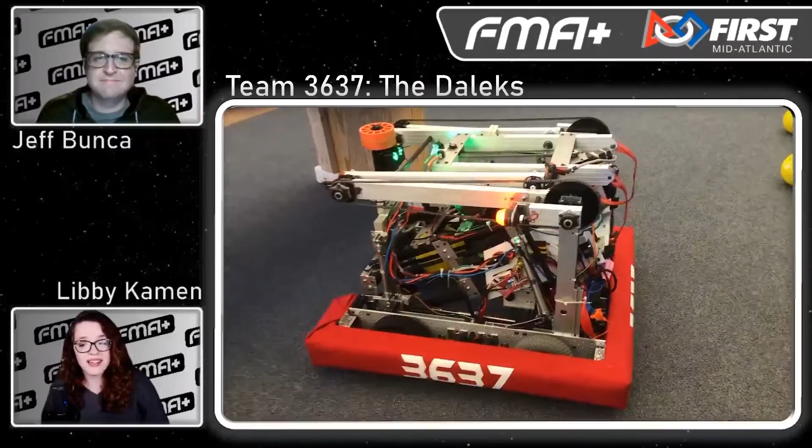Very cool. So let's dive into that robot. Ryan, what were your team's goals when you guys started the season? So when we started the season, we wanted to win a blue banner for our robot this year. That's something we've never done before. So we were really setting our sights high this year. And in order to do that, we wanted to create an innovative robot that could complete all aspects of the competition. Yeah, that sounds like a fair way to definitely compete for one of those coveted blue banners.

Jacob, what did you prioritize in your planning of the robot? What were your priorities? The main thing we prioritized this year was actually the climb. We knew it was a very high-scoring aspect of the challenge, so we really wanted to put most of our effort into making a climb that we knew could double climb very frequently. Another thing that we had to really prioritize was how we were going to shoot, and shooting high versus shooting low really ended up splitting our team.

We really wanted to decide whether or not we should go with the reliability of low shooting or the high-scoring aspect of the high shooting. In the end, we went with the low shooting just because we knew that we'd be very fast with the climb, and that low shooting would just benefit us overall. And we also decided to have a short bot so that we could go through the tunnel to add to that maneuverability. And in the end, it was a hard decision, but we ended up keeping the spinner because we knew it would set us apart from other teams.

Yeah, I know when you talk about dividing the team, whenever there's a huge A or B option in FRC game design, it can tend to be a team splitter. But let's talk about the robot all the way from the ground up, obviously starting from the drivetrain. What was the most special part of your drive base? This year, we designed motor plates from our very own CNC machine. They can use both Falcons and Neo motors.

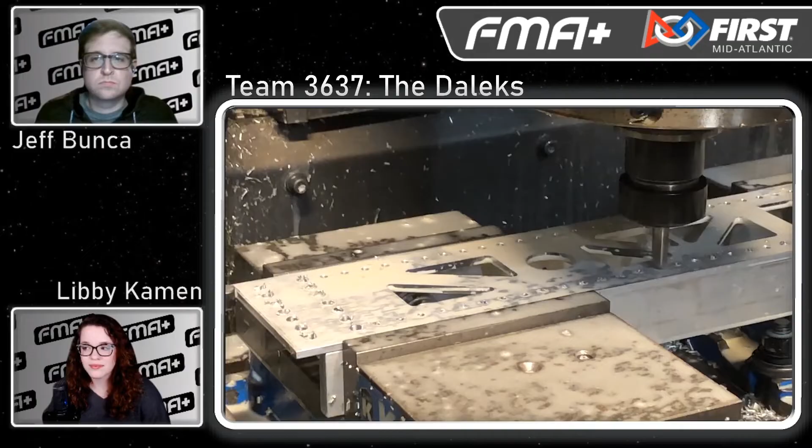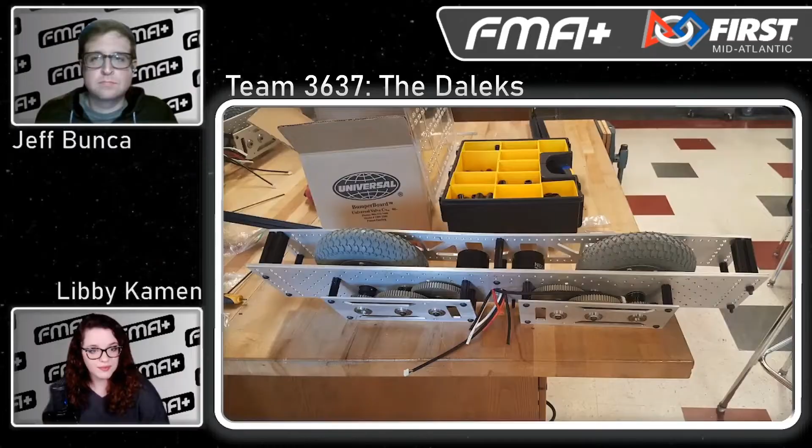And this year we went with 13-to-1 gear reduction for fast speed and adequate power. Our larger drivetrain plates were made by Technotron from our CAD models, and our Robotics 1 class was able to make a trip to Technotron to watch them make the plates. This year we went with 4-wheel drive, but since we had 4 motors, the motors were all spinning at different speeds, and the robot didn't go straight.

So we had to calibrate each to solve the problem. Our 4-wheel drive system also produced a lot of scrubbing on the carpet, making it difficult for us to turn. So we added omni wheels to the front of the robot to allow for easier turning.

But since they weren't the same size as the back wheels, the omni wheels messed up our calibration of the drive system. So in the end, we added Kevlar covers to the two front wheels at the recommendation of one of our mentors at Nokia Bell Labs. Nice. Yeah, sounds like you guys are super resourceful in overcoming some of those challenges that come with new style drive bases and new designs.

So Ryan, let's talk a little bit about the software. Did you have any programming or any software development to maybe help a drive team member or help to play the game in teleop? Yeah, we did actually. So we're very proud of our vision processing system that was on our robot. And it's pretty complicated. It actually did not run directly on the roboRIO. It ran on a Raspberry Pi that communicated with the roboRIO through the SmartDashboard.

And what our vision processing did was identify balls and then track their movement. So it did that by identifying any circular objects that were within a yellow color range of light yellow to dark yellow. And then once it found it, it was able to calculate the distance to the balls, and it could even track multiple balls at one time. But if you had the robot drive to that ball, it would only go to whichever one was closest.

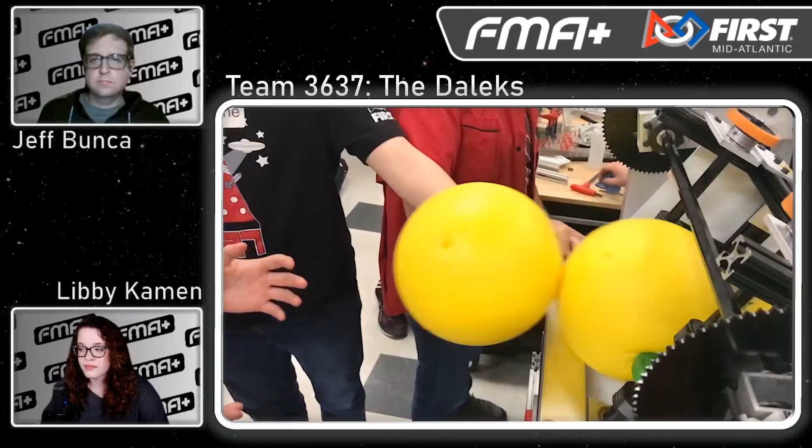We have wheels on the ends to grab the ball and shoot it, and this is all controlled by sensors in the front that control when it's activated, and sensors at the end that stop all the conveyor system until activated by the driver. Our intake system was well thought out this year with pneumatic cylinders that push the roller out, and it's a single clean roller, and there's angle brackets below the roller to guide the ball to the center of the conveyor. We originally had multiple wheels on a hex shaft, but we changed to tubing to get more pressure. The aluminum tube also had polycord on it, but we found that the balls couldn't slide because of the amount of friction on it.

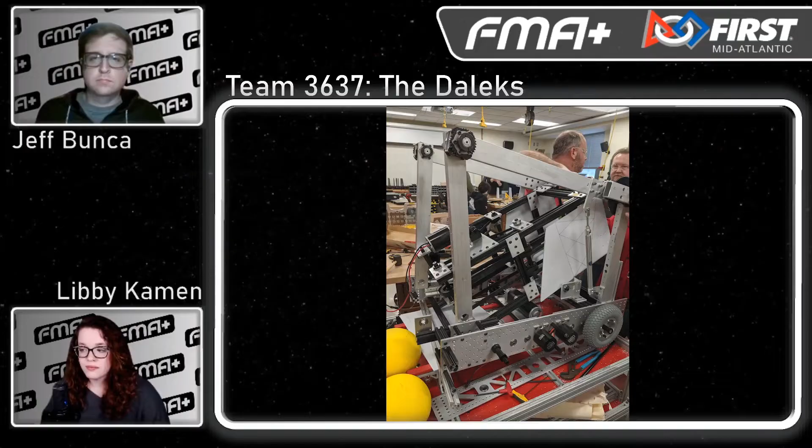It sounds like you guys had a very well thought out, very organized approach to not only shooting the ball, but also pulling the game pieces off the floor and organizing them for shooting. So that's awesome. Let's talk about your approach to the color wheel. How exactly do you guys manipulate that? What kind of spinner or mechanism do you guys use for that challenge?

So at the beginning of the year, even though we had decided that the spinner was for us a low priority, it still could end up being a tiebreaker in a competition. It made us extra competitive, so we thought it was important to have. And so when we were all creating our designs, we always kept that in mind.

So our spinner uses compliant wheels to contact the side of the wheel, and it has a 30-to-1 gear ratio powered by a bag motor, which allows us to spin the wheel in about 2 seconds, which we found was the perfect time. And what's actually controlling it is an encoder for the part where it has to go 3 to 5 rotations. We thought about doing a color sensor to sense what color it's on, but we decided that you could just see the color enough to use that judgment instead of having to add another sensor.

In addition to that, we used a 6-inch pneumatic stroke, which allows our spinner device to go to the height of the wheel, which is very important. Being a trench bot, for us to have a spinner, it has to go up, so it can't just be a static arm. And we use a lightning bolt-esque design to get around a lot of building and space restrictions. So it allows us to connect more to the side of the robot, but still make contact with the wheel near the center.

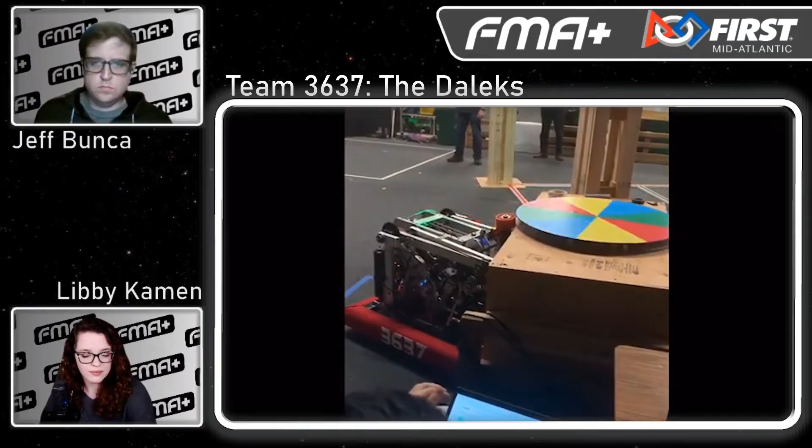We had a number of difficulties with coming to our final design and bringing it to fruition, mostly because we were low priority. Things like the arm and the conveyor took up a lot of real estate and time on the robot, so we had a bit of a time crunch. So in the beginning, we thought of a ton of different designs: things like scissor lifts, static arms, motors to flip it up. And we even debated sitting on top of the wheel or the side. But once our team transitioned into using pneumatics this year, that propelled our design to where it is now. Yeah, that's cool. I think a lot of teams either completely eliminated or underestimated the challenges associated with the control panel this year.

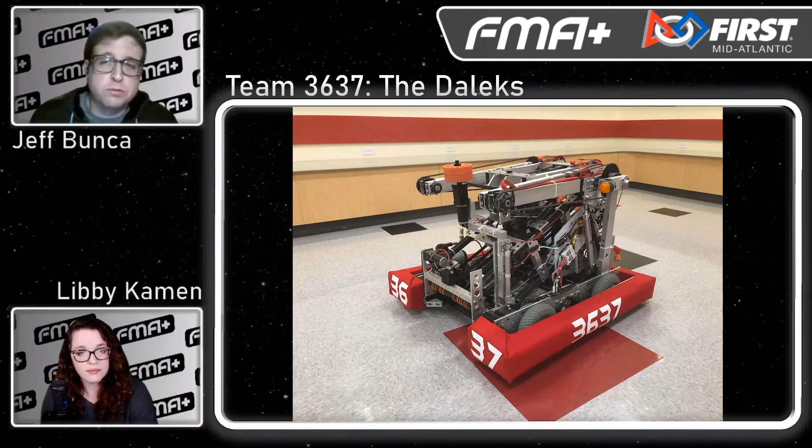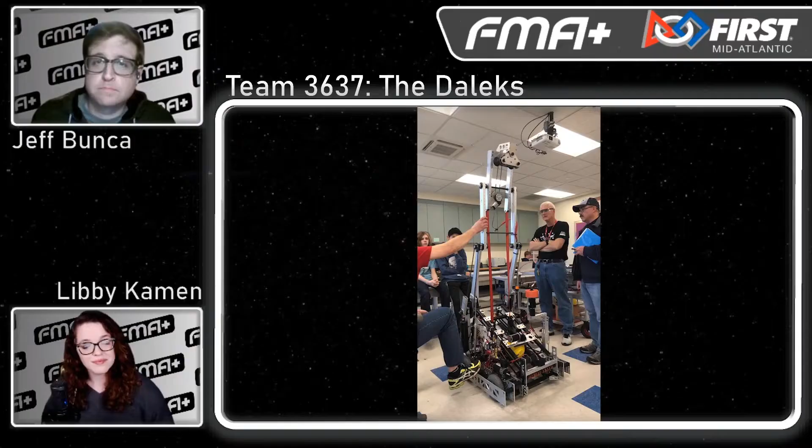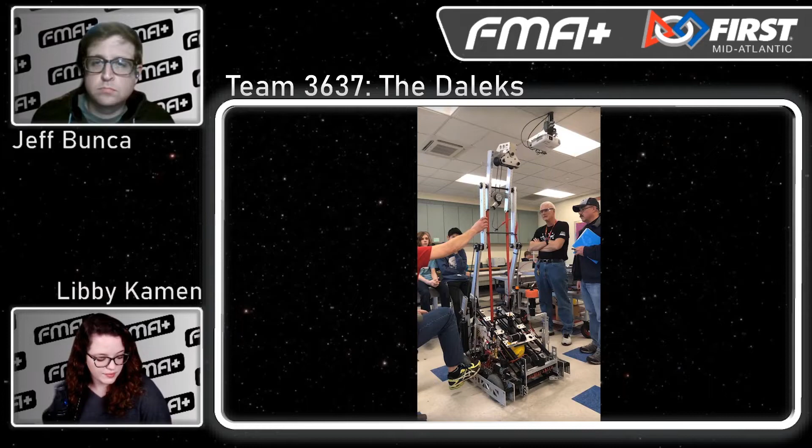Let's talk about the end game. How did you guys approach those final points that you're going to score in teleop? How did you approach climbing this year? So we were very proud of our climb system. We spent a lot of time working on it because we knew how important it was to the challenge. Our system consists of a scissor lift attached to a trolley that allows us to reach the bar at any height. The trolley system consists of a window motor chained up to 2 bolt rollers that wrap nicely around the bar to prevent us from falling off.

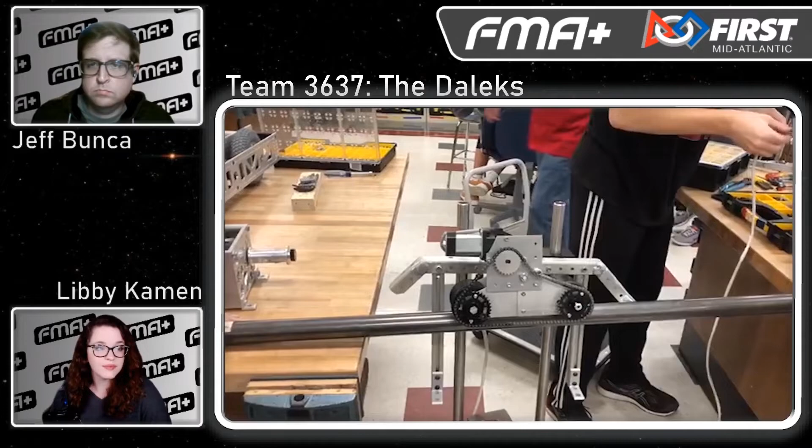What our trolley system allows us to do is move left and right on the bar, so whenever we go up to climb, we can always balance it, whether it's just us or we're with another team. Our trolley system is then pulled down by 2 straps attached to a winch system that has a piston ratchet to keep us at a stable height while climbing. Every time we pull up, it'll lock us in, so there's no possibility of us touching the ground. That winch system also takes a lot of stress off the arms and keeps it primarily on the belt, which meant we were able to have a lot of weight reduction on the arms. As long as our trolley system was stable, we were fine.

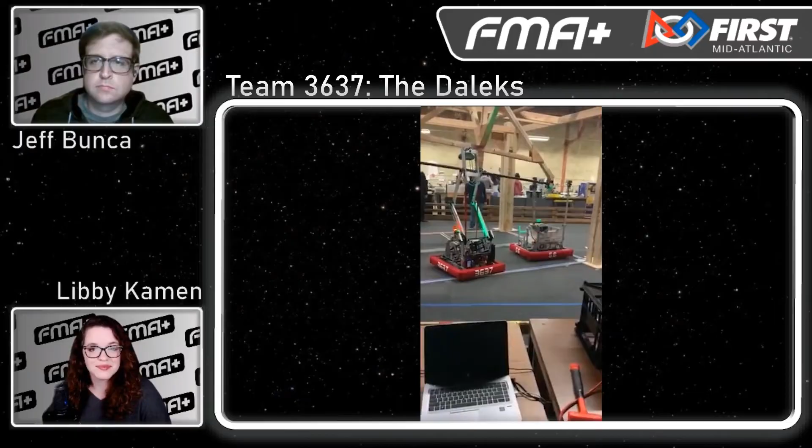So we actually practiced a lot at 303's field, and we were able to attempt a double climb there with 56. Even though their bot slid all the way down the bar, we were still able to climb, and we balanced it out by the end of the time limit. That's really cool. Being able to practice with other teams, especially given the ranking point consideration, is super important. And I love that there are teams in FIRST Mid-Atlantic that host fields for others to play on.

So I feel like one of our themes tonight with you guys is iteration. So while you guys were testing your climb, did you guys encounter any sort of issues that you had to redesign for, or what was your iteration process like on the climbing?

Yeah, so we actually broke our winch system 3 separate times while we were practicing our climb at 303's field. The first time we bent our bracket that held our winch motor, so that had to be redesigned, and we basically just buffed it up so that it wouldn't bend again. The second time, our piston ratchet snapped because it wasn't placed correctly, so we had to move a lot of the electronics on our electrical board and move the piston up a little bit.

And then the last time, actually during our double climb, we never got to our bot fast enough to take it off while 56 was also taking off their bot, and that led to us sliding completely down the bar and hitting the ground, which actually bent our 80-20 holding the winch system, which we had to completely replace, and it took a lot of time to fix that. That's a lot of changes. It sounds like you guys have the final product being this rock solid climber that sounds super reliable and obviously battle tested. So that's cool.

One thing I like about 3637 the most is the imagery and the overall, I guess, team mascot, right? You guys are the Daleks. It's a fun image to have. It's not often that teams pick a villain from a franchise to emulate, but this is definitely an awesome one. So that being said, I'm a little curious about what you guys named the robot this year. Sean, maybe you could shed a little light on that. What did you guys name your robot and why?

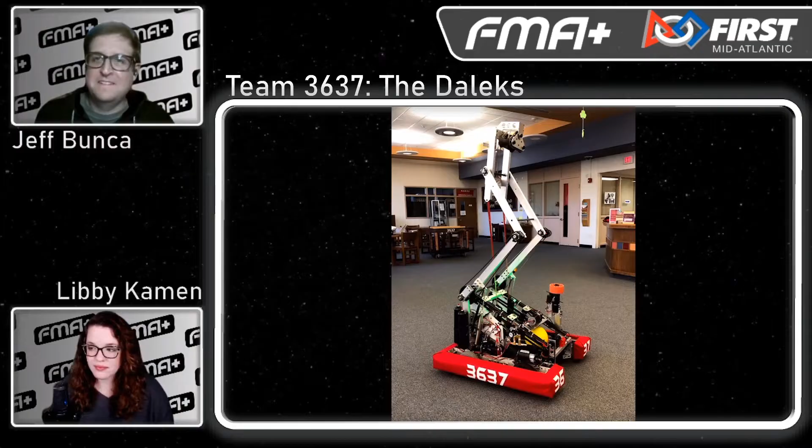Well, thank you guys, Team 3637, the Daleks, for sharing your story tonight and the deep dive on the robot. Are there any other final bits you'd like to share with the FIRST community this evening? We'd really like to thank first our mentors and our sponsors. They really helped us out this season, and we couldn't have done it without them. And we're very excited for whatever FIRST will come up with in the future.

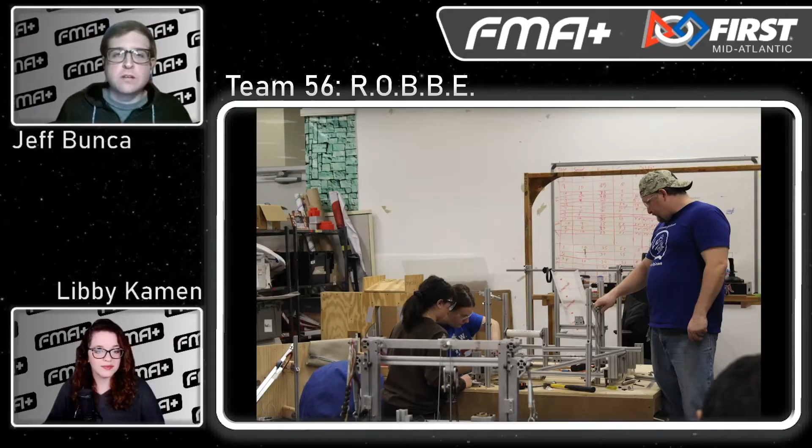Awesome. Yeah, it sounds like you guys cover a lot of bases and keep yourselves very busy. I also like the focus on safety, right? You can never underestimate the importance of a subject matter just like that. So Jenna, I'd love to hear more about what your team does right after the new year, as you're gearing up for build season. What kind of motions does Team 56 go through?

To start off the new year with the new members of the team, we would run 2 meetings a week just to kind of introduce the new members to our team and get them motivated to keep on coming. We want to get them interested in what we do. So one of the meetings every week would be focused around engineering. We would also talk about all the different tools. For another week, we would go through everything to kind of introduce it.

So when we bring the new students to our build area, we usually introduce that when it gets closer to the kickoff. That gets them more prepared for the kickoff, and so they're not shy to ask questions. For example, one meeting, a mentor would bring a box of different types of motors, and the returnees would explain how the motors work and what type of situation you would use certain motors for. Then on one day, we would go over pneumatics. We would also do hands-on activities that would help the team bond and have fun.

I feel like that preseason bonding is so important, especially when it comes to learning how robots come together, but just in general forming what you guys are like as a team and your culture. So I hear, Jenna, that you guys have a pretty fun kickoff weekend. Tell me a little bit about that.

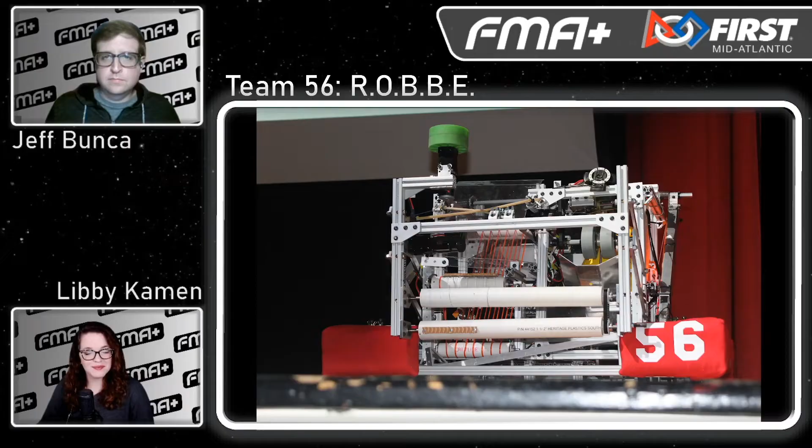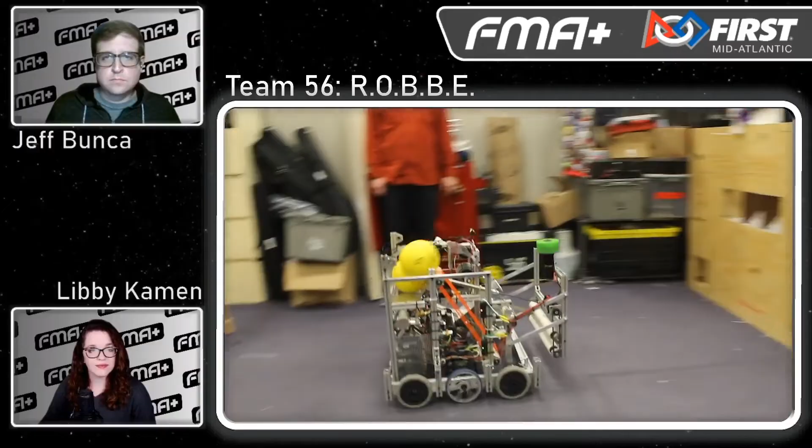Okay, so for this year, our 2020 robot, we decided to go for our smaller height robot. So I'm gonna start with the intake. We have a long roller on the front that can pick up balls from all angles. It is the whole width of the robot, not just one ball width. This is something that not all robots do. We saw that every robot just picks up the same width of the ball. Ours, we decided it can go from any angle, it can pick up as many as it needs in one shot.

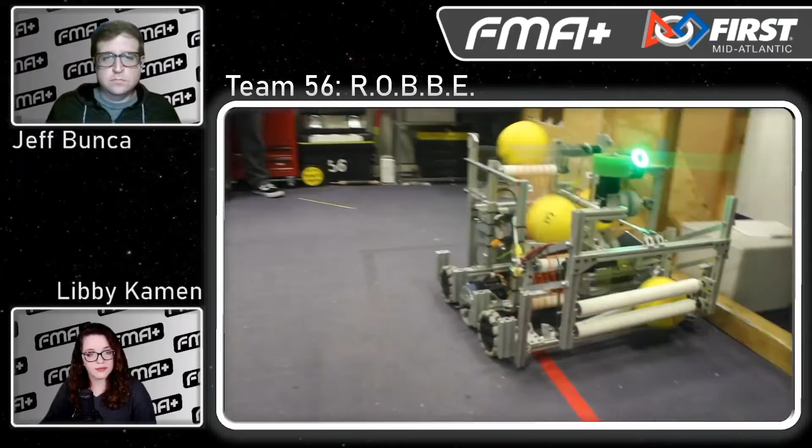So once the balls are in the robot, they travel up the conveyor belt, which are the orange belts. The balls will fall down into a trough where they will turn into a shooter. The transfer from the powered conveyor belt to the shooter is gravity fed, which is not powered. Making it gravity fed means we do not have to worry about the gaps between the balls coming up the conveyor belt, which we found the balls squeeze in every little tight crevice they can find.

So next it will go to the shooter. The shooter is made from 4-inch dual wheels next to each other. We found that having the 2 wheels makes our shots more accurate. It adds mass to the flywheel and reduces errors if the balls don't come in perfectly.

So now moving on to our climb. We have an arm which is on the side of the robot, which is held down by an air cylinder. Once the air cylinder is pulled in, the arm will pop up since it is on a loaded spring. Once the robot is in position, we have a bigger cylinder which is attached to the arm. At the end of the cylinder, there is a semi-big hook which is attached by a small zip tie.

The idea of this is when we go to climb, the cylinder will extend the hook onto the bar. Once the hook is on the bar, the air cylinder will come back down, having a lot more force than normal, making the zip tie break. The hook has a 1/2 inch wide nylon strap which is also attached to the winch. The winch is located closer to the back of the robot.

We decided to go with this because most of our weight is on the back of the robot, not in the front, so we wouldn't have as many problems. So once the hook is on the bar, the winch will wind up the wide nylon strap until the robot is no longer touching the ground.

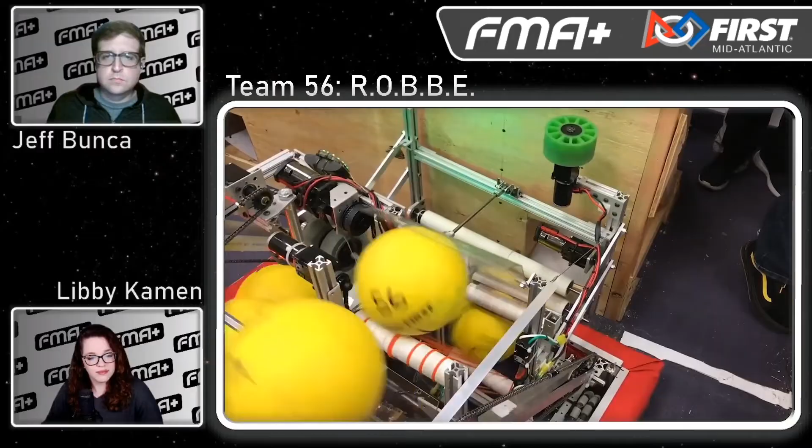Lastly, we have our color wheel. As I talked about previously, our color wheel has two compliant wheels that are stacked together. They are placed at the top of the arm in the upper corner. So when we come to the color wheel, we'll pull our arm in and then have the operator control the wheel to however many rotations we need. We also have a standard USB camera, which we use to help find the correct color that we are given. We also use that camera for when we are shooting.

Wow, that's awesome. You guys definitely took on all of the game challenges, and it looks like you came up with some great solutions there. I'm excited to see this robot in action if and when it happens, right? Hopefully it does. Fingers crossed.

Evie, let me ask you, it seems like you guys are really integrated into the community. Is there anything special you guys do to unveil the robot to the general public once it's ready to be shown? Okay, so every year after we have revealed the robot, we will have our annual robot reveal, which is at our Bound Brook High School, which is always open to the public, and we even make videos for it. So this is to show what our team does, how it's run, and what we have set up.

Then lastly, we'll show off our robot, how it works, and we'll then go travel to the cafeteria and we'll let people drive the robot. We'll show how it shoots or whatever the game is that year. But we would also have some of our other sub teams stationed around like safety, team development, outreach, strategic planning, and everything else.

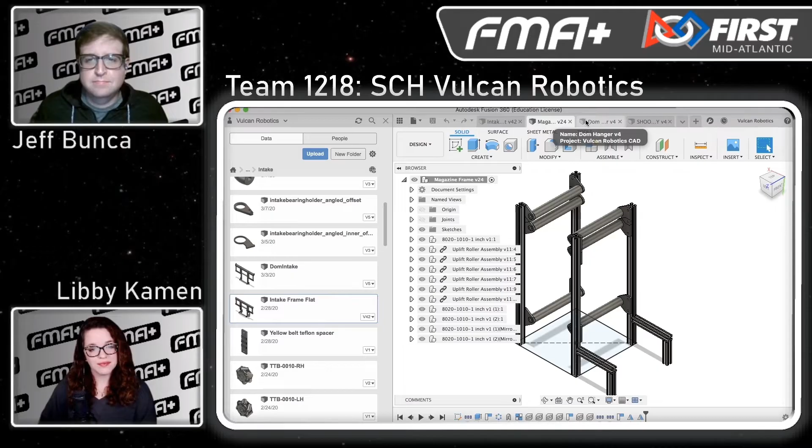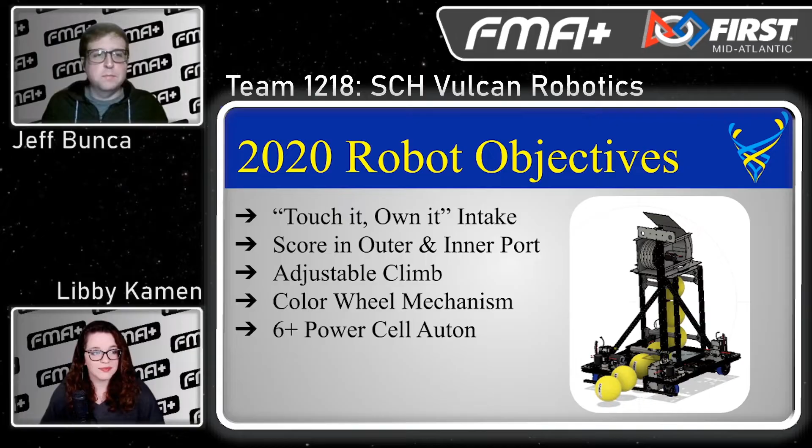Yeah, so this cooperative CAD system really helps us to create a modular design for a robot. So we understand that to be each mechanism on a robot being easily repairable in its own unit. And this actually really came in handy during quarterfinals at Hatboro because our intake broke when our driver slammed into a wall. But because of our modular design, we were really easily able to swap that out. And with the extra weeks of bag this year, having that modular emphasis meant that we could continuously improve on our designs. Nice. Yeah, I think modular design is clutch if you know how to do it well.

With that, let's dive into the robot itself. So Julia, let's start at the bottom. Tell us a little bit about your drive base. Yeah, so this year we saw a return to the 1218 swerve drive. And this has been a project of over a couple of months. So during this off season, we were working on building modules, designing modules, and creating practice code for a dummy chassis that we finished in December.

And looking at this season's game, we thought that the maneuverability of a swerve drive would be really advantageous because we determined this to be a really evasion-focused game, especially at the higher echelons of competition, which a swerve is good at inherently because of the way that it operates. We also thought that this would be a cycle time game, and that led us to picking the tallbot and then led us to picking the swerve because if we're tall, we might as well be maneuverable. As Abby's going to elaborate upon, we encountered a couple challenges due to lack of student experience, but we really do love the final chassis.

Unfortunately, due to the nature of a swerve being an 8-motored beast, we had a couple more motors than were allowed in the rules. Yeah, I can elaborate on that. I'm Abby, by the way. I'm a senior in programming and electrical. And it seems a common theme with teams now to have more motors than the number of PDP ports there are. And the way our team solved that problem is by wiring 2 bag motors downstream to 1 Talon controller, which is allowed in the rules and made us really happy because with that, we can identify mechanisms that will either always run together or never run together.

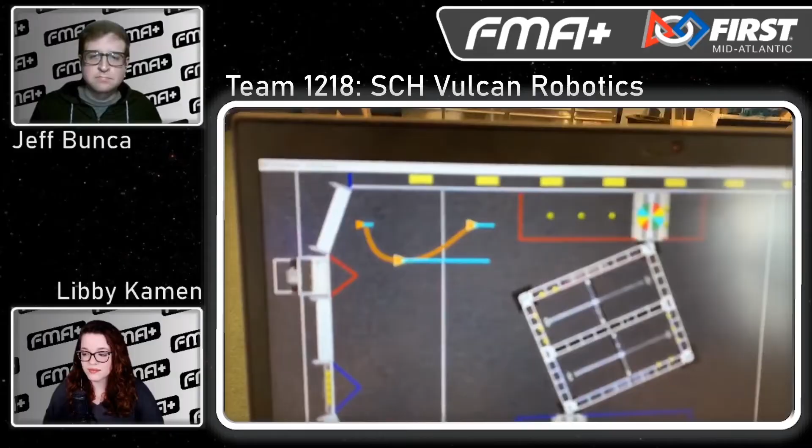But in the end, we made really good use of all the resources that FIRST provided us through the WPI libraries and software. For example, we used the Pathweaver app to plan really successful autons. And then we used resources from other teams and on Chief Delphi as well. Yeah, for sure. You got to make the most of what you got. And I know the bag motor trick was huge when people found it in the manual. Like you said, the PDP slots were the biggest design challenge electrically this year for sure.

So let's keep going from the ground up. Julia and Vicky, why don't you tell me about the intake and the tower? Yeah, so starting with the intake, this year is a product of continuous iterative design. And like I said, a really growing emphasis on our team to develop that modular design. So learning from the last 2 years with our past two robots, we noticed that they both had intakes that were very difficult to replace. So the intake this year was designed in a way that is super replaceable with the removal of just one hex shaft and a couple bolts.

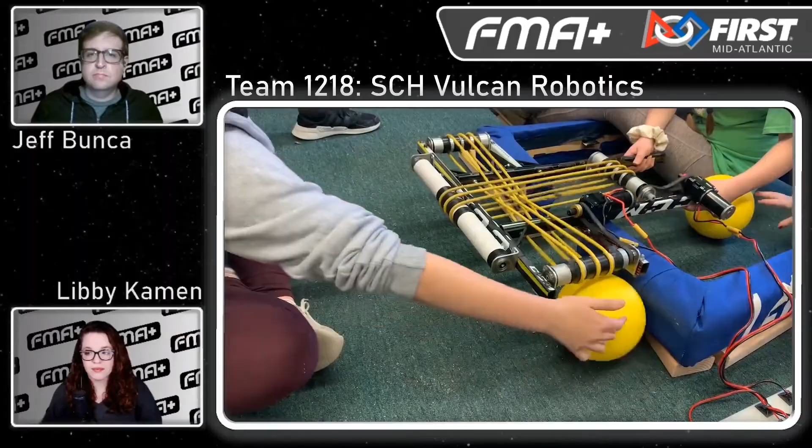We also really wanted to prioritize a touch it, own it style intake, which was actually modeled after 973, the Greybots' 2012 robot, since we felt that our 2019 robot took a little too much time to pick up cargo. So because of our infinity belt system, the intake can pick up power cells from tapping them anywhere on any side of the intake. As you can see in the videos, we started using yellow belts for our entire intake mechanism. Later in the season, we changed out some of the belts for a sturdier style, but we kept the horizontal infinity belts because we liked how well it brought the game pieces into the tower.

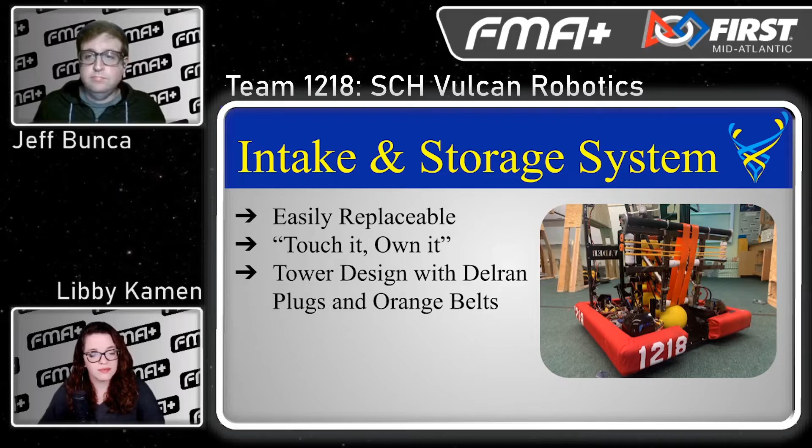So our tower system has gone through many prototypes, ranging from using compliant wheels to bare hex shafts to manipulate the power cells and bring them up to our shooter. Ultimately, we used a hex shaft with Delrin plugs on each side with a red plastic tube covering it. These rollers would turn our orange belts, which brought our power cells to the top of the tower.

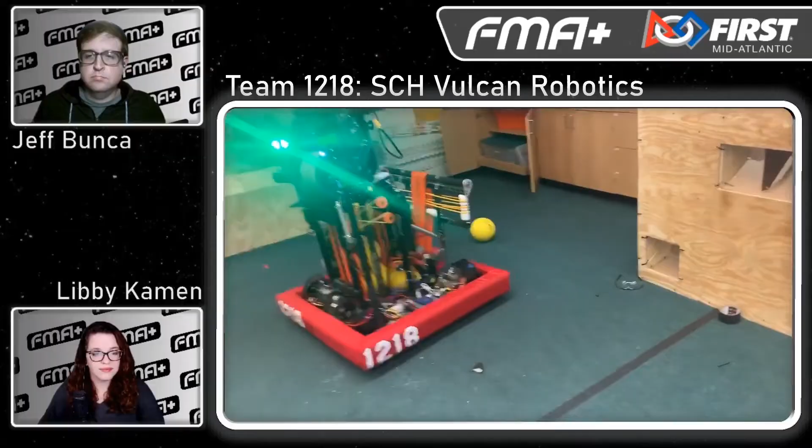One challenge we ran into was the rollers buckling in the center from the pressure of the tight belts, but with our previously mentioned modular design system, we were easily able to check each individual system, so the rollers were easily removed and the Delrin plugs to support the center of them were machined. Our swerve modules also take up a large amount of space on our drivetrain, so we added polycarb sheets to one of the sides of the tower and zip tied some more lightweight electronic components to it.

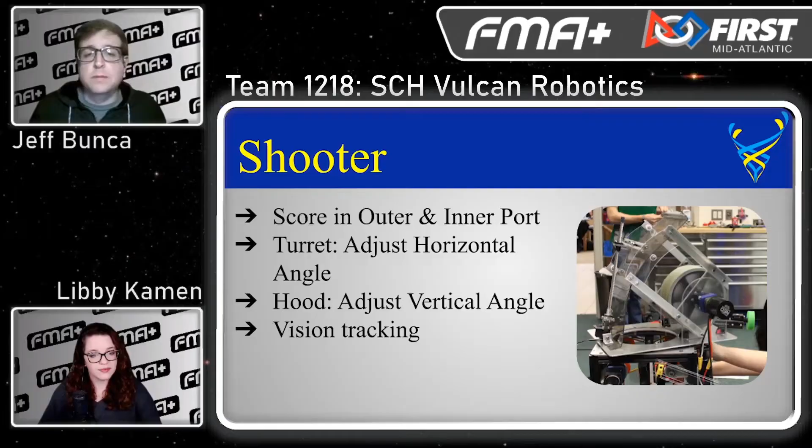I'm a little curious about the firepower this robot is packing. So maybe, Abby, you can talk a little bit about the shooter. Totally. Yeah, so our shooter prototyping started by actually looking back to the shooter bot that we made in 2012. So that was the basketball game. And as the video clip shows, we actually shoved power cells into that bot and made it shoot them out. And that totally worked. Actually, it was the day right on kickoff. So it was nice going in knowing we have robots and mechanisms that can make the long shot.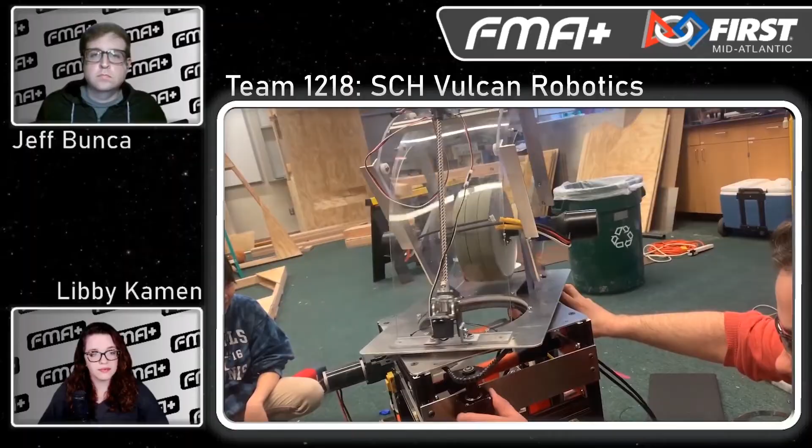And on our shooter, it has one motor that changes its turn or yaw angle, one servo that changes the pitch of the hood with a lead screw, and then one flywheel that's powered by a NEO. And this allows for a very large range of shooting positions from the auton line all the way back to the back of the control panel. And it allows us to execute our strategy of being able to shoot behind the control panel.

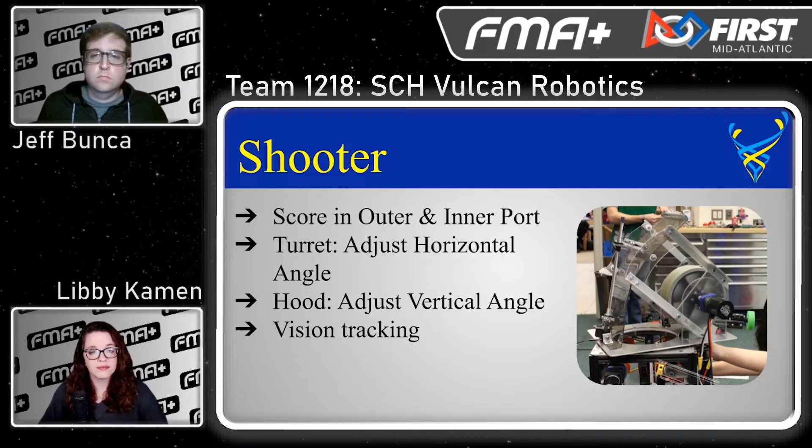A little more on the programming side of things, the turret is fully automated with a Limelight. Last year, we used the Limelight to do a simple auto docking routine to the rocket. And then we used that experience this year to create an auto aim program that will quickly turn and pitch the turret to center on the target and even correct for the parallax between the inner and outer ports in order to make that center shot right on. And the Limelight also uses trigonometry to determine the robot's distance from the target, so we're less dependent on gyros or odometry that will shift over time. And it applies an adjusted velocity to the shot.

Very cool. I always love hearing about shot automation because with how big the goal was this year, just about any mechanism could get the power cell into the outer port, but that inner port turned into a software problem. So I think that's pretty cool. So Dominique, we've got a couple mechanisms left. We know how power cells are getting across the field, but what about the climb?

What about endgame? Yeah, so when it came to designing our climbing mechanism, one thing we knew really early on is that we wanted the ability to adjust our position on the bar. And our goal in that is to be compatible with any other climb mechanism so we can always get the ranking point when climbing with another team. And this is similar to our 2018 design when our climb had a string that allowed us to move away from the bar so another team can climb.

The coolest part of the prototyping process for me personally was definitely coming up with our contoured roller design. And so we initially used tape to create curves on two sets of hex spacers to roll along the bar, but found we too easily fell off the bar. And that's when we came up with the idea for rolling wheels that fit the curve of the bar.

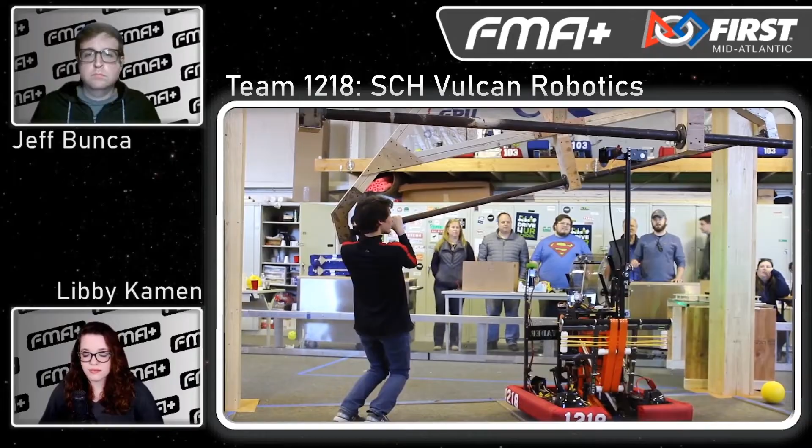We used Ninja Flex, which is a 3D printer filament that added to the grippiness of the rollers. And this special filament meant that it actually took 23 hours to print a single roller, which made it a really unique feature of our robot.

The climb is driven by a winch with a software automated pneumatic brake to pull our robot up and down on the bar. And the robustness of this climb was shown when we had a triple climb in our first match of the season and then continued climbing consistently in our matches during Hatboro.

Nice. Yeah, I think you guys are right on with trying to make your end game as compatible as possible with any of your team members, right? Let's talk about the control panel, a small area that a lot of teams have decided not to pay too much attention to. I'm curious how you guys approached that challenge.

Yeah, so our control panel manipulator was actually designed by an underclassman preparing to take on leadership in the upcoming years. And we were very excited to activate stage 2 during qualification rounds at Hatboro Horsham, which was the only time it was done at the competition. And the mechanism we created was pneumatically actuated and had a REV color sensor to fully automate both stage 2 and stage 3. Very cool.

So Dominique and Abby, let's talk a little bit about strategy and scouting. Awesome. So on 1218, one of the things we are proudest of is our scouting. We collect 3 different types of data, each serving a different purpose when determining match strategy and alliance selections.

So before every competition, our strategy team analyzes every robot qualitatively in a Google spreadsheet. And this involves watching match videos or even looking at social media and build season vlogs during early weeks of competition. And this gives us a sense of which competitors are standing out at an event.

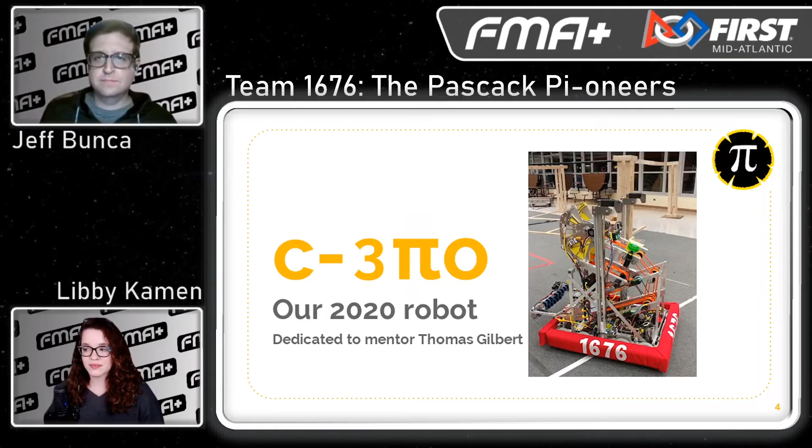Yeah, so after the game is revealed every year, we spend the first 2 days of our season in larger team meetings. During the first few days, we end up setting the tone for the rest of our season, and we decide on our priorities and discuss potential mechanisms. We first decided on building a taller robot, that way we weren't constrained by our height. We thought that more competitive teams would decide to use the trench, so we wouldn't be losing a path to

score anyhow. We also decided we wanted to intake and shoot in opposite directions to optimize our auto and for faster cycle times. This was similar to Team 341 Miss Daisy and how they built their robot in 2012. Our number one priority for this year's robot was to score in the high goal and to minimize our cycle time because it would be the only way for us to consistently score points outside of the end game.

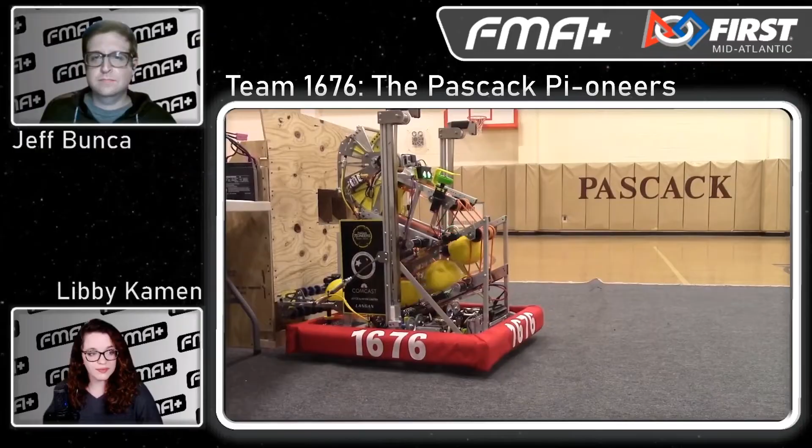Climbing was our second priority, but it was something that always needed to make it onto the robot no matter how simple it was because of the large number of points that it earned. While our goal was to be able to complete all aspects of the game and not to be forced to rely on other alliance members for anything, we decided that the control panel was our lowest priority because it would be simple for us to integrate later.

With our goals set in the first 2 days, we split everyone up into their subteams and begin to prototype and design the robot. Very cool. So let's take a deep dive from the ground up. Luke, let's start with the chassis.

Yeah, so this year's chassis is the first fully welded chassis in team history. We are using West Coast drive with 4 Neos, 2 on each side. We are running 2-speed AndyMark EVO shifters with a high speed of 13 feet per second and a low speed which is about 6 feet per second.

That's right, you heard me correctly. We are running a West Coast drive with AndyMark EVOs. Due to our past luck and love of AndyMark products, we wanted to stick with them. Students worked over the summer to make custom pieces that would be able to run our chassis just the way we want it. Our robot drives on 8 wheels with the center four dropped for better balance.

We're using 6-inch Colsons, which we decided to go with because we wanted to always be balanced while shooting and wanted better traction to withstand defense from other teams. They also have better traction for driving through the rendezvous point. This year's chassis also has a full belly pan.

Nice. Yeah, I appreciate the brand loyalty in terms of your products that go onto your robot, and it sounds like an interesting twist on a somewhat simple engineering challenge that you guys took on. So props to you guys.

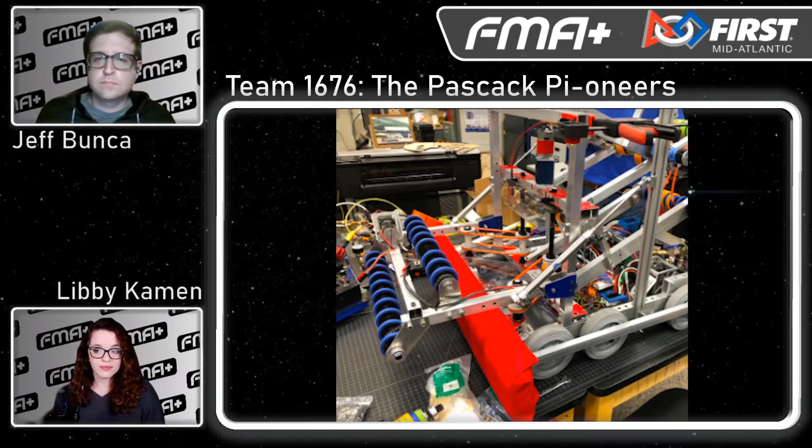Ava, let's talk a little bit about game piece manipulation. Can you tell us more about the intake and maybe some of the paths or the travel that the ball went through once it gets on board? Yeah, so we have a retractable intake that is deployed using pistons. We also have a funneling system that centers the ball, which was inspired by Team 1885, 3847, and 6135's 2020 prototypes.

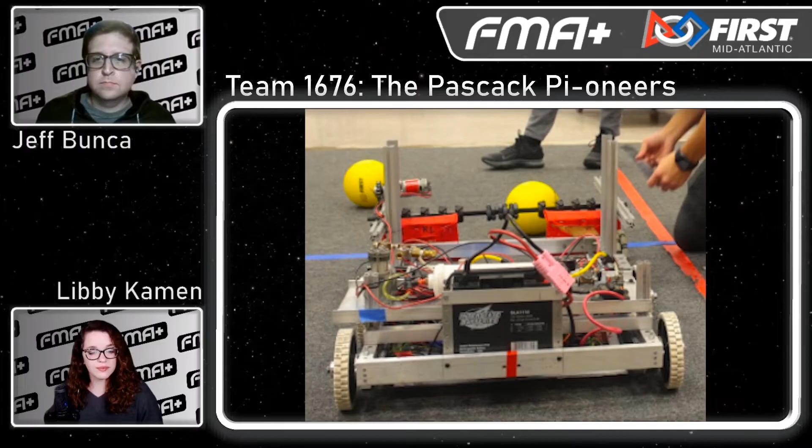Going into building the intake, we knew that we wanted to have something wide that could take in multiple balls at once, and something that would center the power cells. Initially, we used a single axle with vectored wheels, but we experienced jamming because the balls would get stuck on each other in the center.

We moved on to 2 axles, one with normal wheels, one with vectored, and a Lexan shield, but it still jammed. What we ended up with was a dual axle system with no vectored wheels. However, we replaced this centering system with a polycord funnel that has 2 sides that run at slightly different speeds, which centers all of the balls in a single file line to head into the travel system.

So let's talk a little bit about that ball travel. Yeah, so we ended up with a polycord and poly belt mechanism that had an upper and lower stage and allowed us to fit and store 5 balls and feed them quickly to our shooter. It also uses sensors to space the balls evenly, which was really important to prevent jamming. We had 2 prototypes going for this mechanism.

One was an octagonal hopper with a helix-shaped ramp inside, and an axle with surgical tubing that hits the ball up the ramp. This was inspired by Team 1717's helical hopper from the Lunacy game. It reduced jamming issues, but it minimized electrical access and changed our weight distribution, which was a big issue with Climber, and that was a higher priority. It also made us have an off-center shooter, which we didn't want for driving.

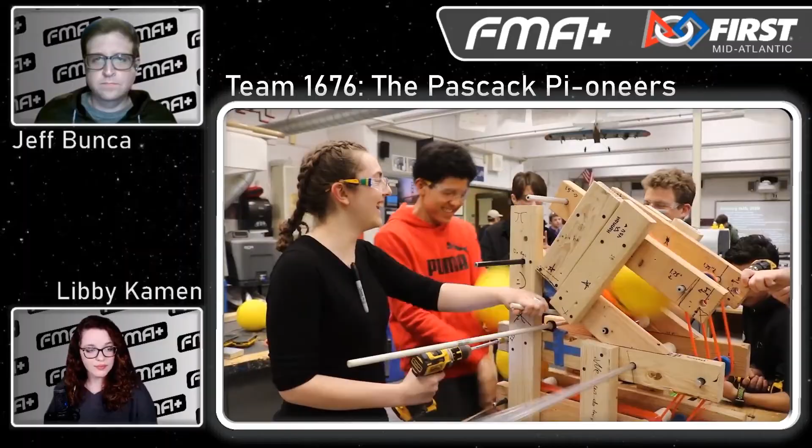Our other prototype, made out of polycord, was centered and made it easy to know the location of the ball. This is inspired by Team 1676's polycord elevator from the Rebound Rumble game. After deciding on the polycord system, we did some fine-tuning with sensors and motor adjustments until we could space all of the balls with no jamming, which we were really happy with.

Nice. Yeah, it sounds like you guys know where to go to find past mechanisms that work. I would appreciate the most that you're inspired by a previous PASCACK robot, right? So you guys know what works and you decided to use it.

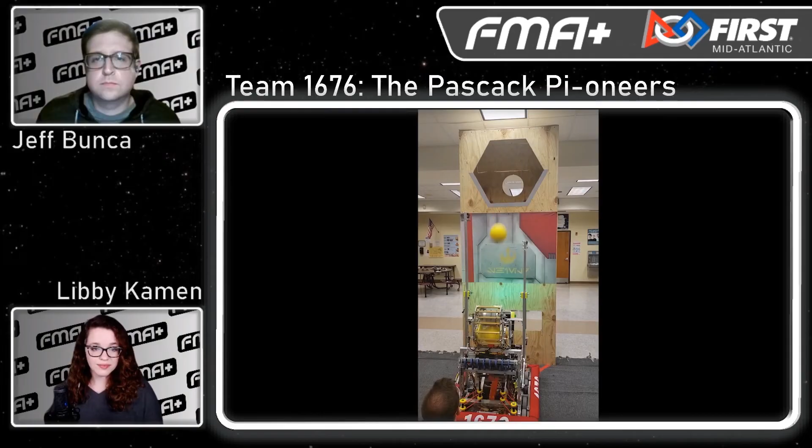So that's awesome. Let's talk a little bit about delivery system. How are you getting the game pieces to the goal now that they're organized and on board? Yeah, so what we love most about our current shooter is how highly adjustable it is because we can change speeds and hood position. It allows us to shoot from the target zone, initiation line, the front, and the back of the trench run. We tested with Colson wheels at first, then decided to add flywheels to increase our moment of inertia. This keeps our speed stable, which allows us to do rapid shooting without losing speed, therefore making us highly accurate and highly efficient.

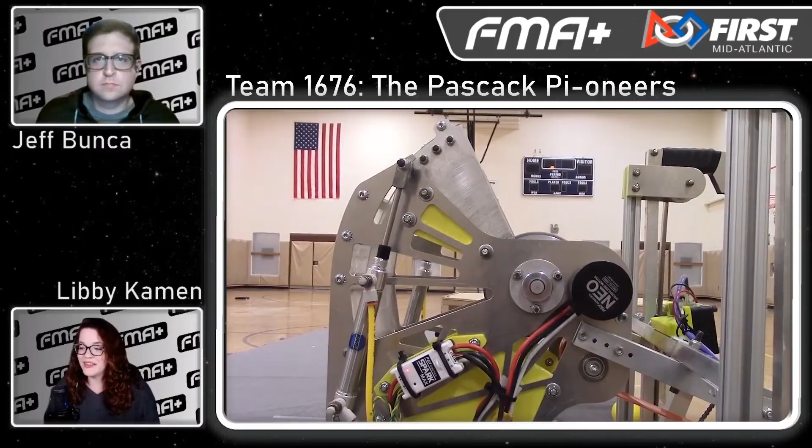Next, we tested the adjustable hood, which was inspired by Team 254's 2-position shooter in 2012 during the Rebound Rumble game. We were really grateful for our laser cutter during all of this prototyping because it allowed us to make wooden prototypes and fine adjustments without worrying about dealing with metal. All of this fine adjustment led to the highly accurate shooter that we ended up with. Yeah, I know the faster you can get iterations through, the faster you can arrive at the solution that you actually want. So definitely helps out a lot during the build season process.

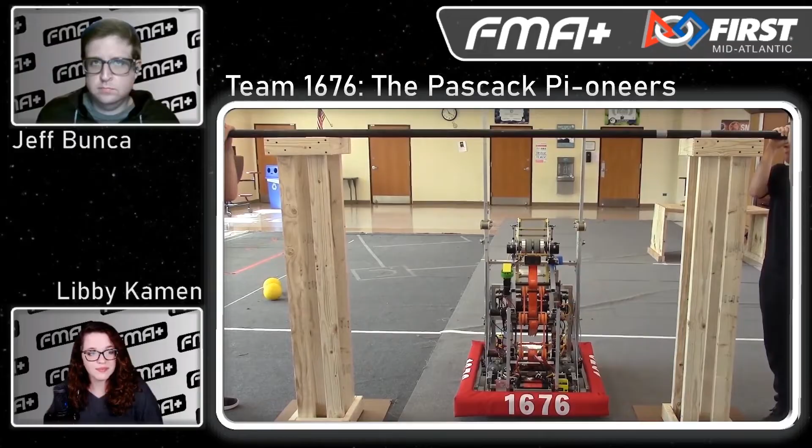So let's talk about that higher priority, right? That climb. Luke, let's dive into that mechanism. So as Ethan said before, climbing was one of our top priorities. After looking at a few different designs, we decided to go with something inspired by a past 1676 robot climber. Our climber uses a flat torsion spring deployment, which is released by a gate latch. A winch operated by a Neo motor with a 63-to-1 gearbox pulls the Delrin slider down the 80-20 extrusion to retract after connecting onto the shield generator.

This climber mechanism was designed so that each arm can retract separately to better our weight distribution to help balance a triple climb. Cool. Yeah, I mean, reliability is key here, right? And I think you guys have something that's both reliable, or at least it seems very reliable, and it seems like the deployment and the overall process of use is super quick, which is awesome when it comes to end game mechanisms like climbers. So well done.

Ethan, let's talk about some software. What kind of auto and programming attributes went into this year's robot? So this year we decided that we wanted to have 3 different autos, that way we could be flexible with our strategy in any given match. We wanted our first auto to be one where we would shoot 3 balls that we had at the beginning, and then moved on to grab the 3 that were in our alliance's trench and shot them. Our second auto was a 5-ball auto, where we would grab the 2 balls in the opposing alliance's trench, and then we'd move on to shoot all 5.

It was important for us to grab the 2 balls before shooting. That way we could avoid any penalties that could have come from a team that may have been trying to get them on the opposing alliance. We also wanted a simple auto where we could shoot the 3 balls that we started with from the starting line and then drive off of it in order to be effective in auto where our alliance members may be stronger than us and might get in the way of our typical autos.

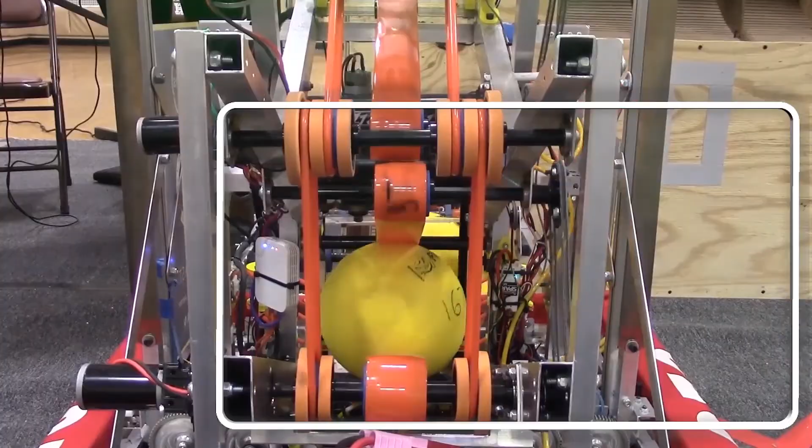Besides for auto, our programming team worked really hard this year using time of flight sensors to automate our travel mechanism and create smooth transitions between mechanisms as balls are collected. We also automated processes like shooting so that a single press of a button could fully unload the robot. In order to have the most accurate shots possible, we used the Limelight camera to auto-align with the goal and PID to keep our shots consistent.

Programming was by far one of this year's greatest challenges due to the requirement of many of our mechanisms to be automated. Yeah, that can definitely be a struggle, right? The mechanical team can build absolutely anything and make it really awesome, but to truly add that optimization, that automation, you need a really strong programming team, which it sounds like you guys have.

Well, guys, we really appreciate the deep dive into the robot. I'm so excited to see it and to learn more about it. But you guys also have your reveal video prepared for us, and I want to check that out while I hear all the last little stories about this year's robot.

We dedicated this season to our mentor, Thomas Gilbert, who had 2 grandchildren on our team and continued to mentor us once they graduated, which we will always be grateful for.

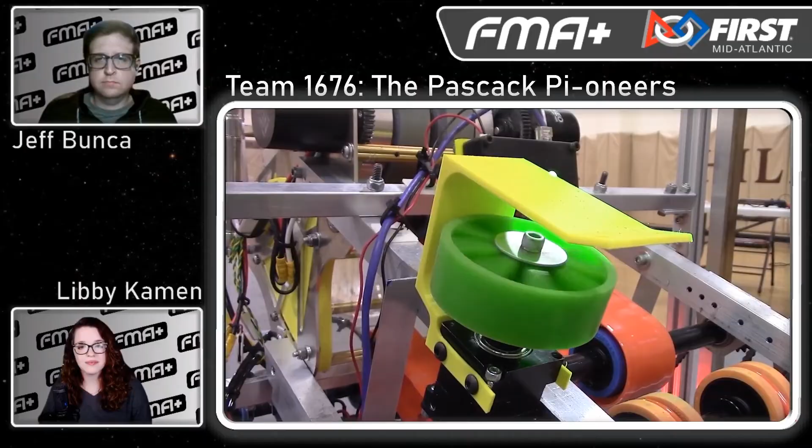As you can see during all of these close-ups in our video, most of our parts are made by hand. This is something really unique to the Pi-oneers because a lot of advanced teams have parts fabricated and machined, but almost all of our pieces are made by hand by the students. Our only exceptions are our shooter plates and chassis rails and welding, because those were really precise pieces that we wanted to have machined.

Yeah, but this year we also got to make use of laser cutting and 3D printed parts, which were some really awesome things for us in prototyping and in our final robot. As you can see on the robot in the reveal video, there's a lot of yellow plastic parts, which we 3D printed this year, and it was really awesome to be able to make our own custom pieces.

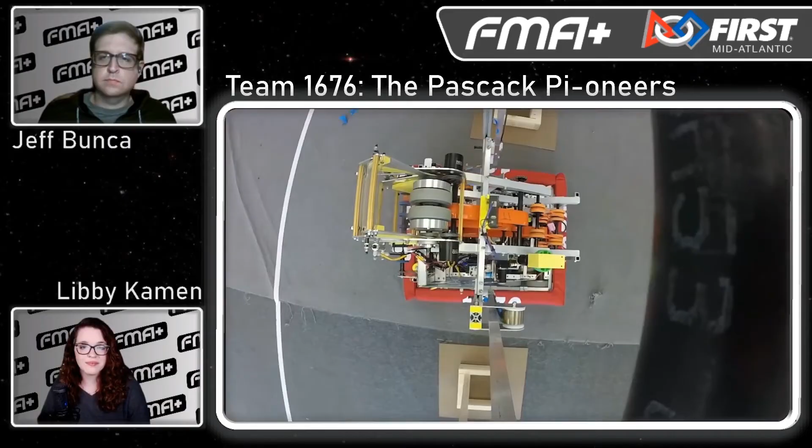You'll also be able to see in the video that our robot can climb with the 2 independent arms moving at different speeds. That's also going to help us be able to balance during different times in the matches where we want to get that balance ranking point. You can also see that we spin the wheel of Fortune while shooting, and that's actually a possibility for us. We wanted to build that into our strategy.

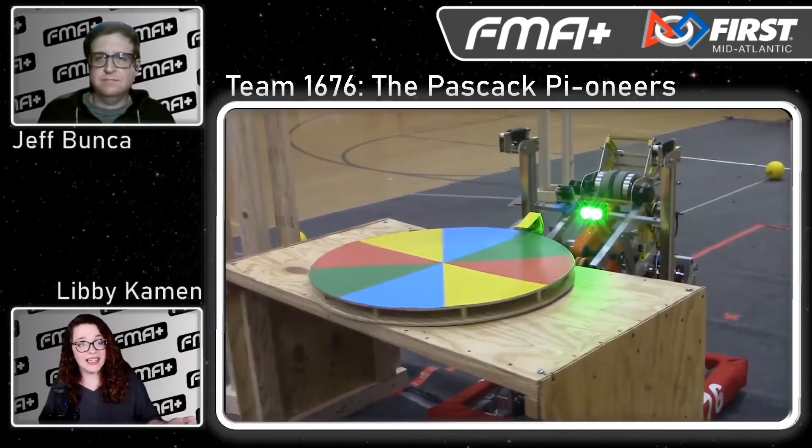No, that's really cool. I love the idea of thinking through your gameplay strategy far enough ahead that you're trying to think about simultaneous action. So I like that you guys planned in the fact that you're going to want to potentially spin the color wheel while you're taking your shot. That's really smart.